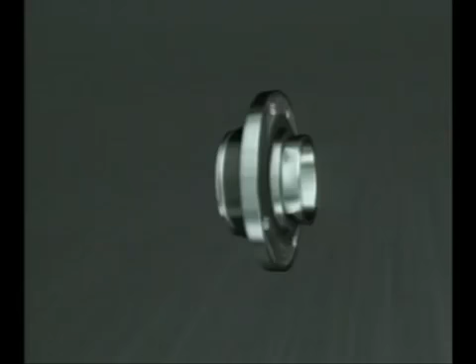Overcoming friction has challenged man ever since he invented the wheel. Friction occurs between contacting surfaces that are in relative motion. If the loads and relative movement increase sufficiently, without lubrication the surfaces will fuse together and seize up. The main purpose of lubrication is to provide a separating film to prevent this happening.

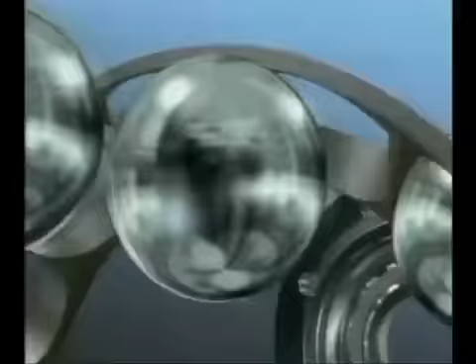For almost a century, SKF have been involved in the reduction of friction and wear by the development and manufacture of a range of rolling bearings and lubricants.

Rolling bearings can carry very heavy loads at extremely high speeds, and it's essential to have a film of lubricant between the surfaces. Mineral oil is generally used to create the very thin oil film, which is between 1/10 of a micron and up to 1 micron. Very smooth surfaces and clean conditions are required to prevent the film being penetrated and wear started.

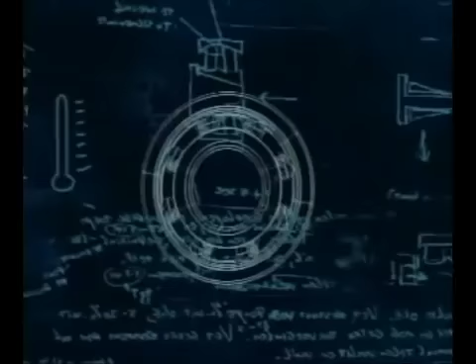To achieve an adequate oil film thickness within the bearing, a number of variables must be considered. The most important is the viscosity of the oil, which influences the film thickness. This is specified as centistoke, or millimetres square per second.

As viscosity changes with temperature, this is usually quoted at a reference temperature of 40 degrees centigrade. Viscosities used for bearing lubrication range from 2 centistoke, which is very fluid like water, up to 500 centistoke, which is comparable to syrup.

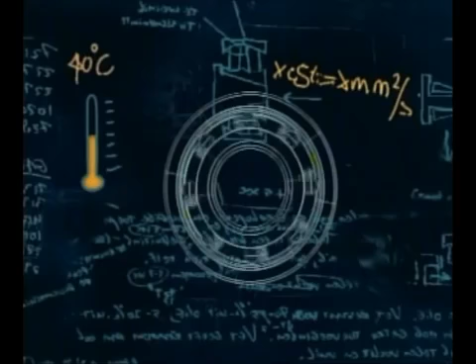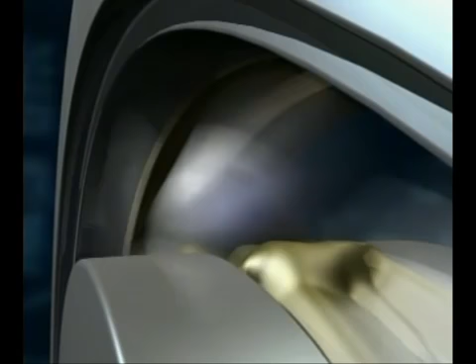The operating speed has an important effect on the lubrication film thickness. As the speed increases, a condition known as hydrodynamic lubrication develops, which significantly increases the oil film thickness. The effect is similar to aquaplaning.

At slower speeds, higher viscosity oils are required to maintain an adequate oil film. In very slow and heavily loaded applications, additives to improve lubrication are required.

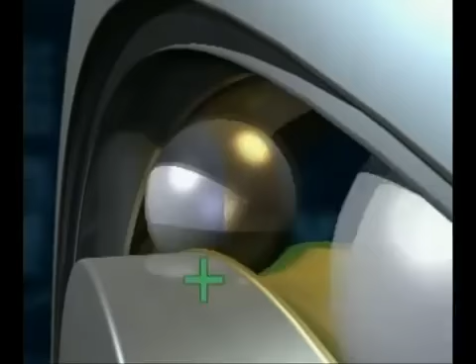Temperature within the bearing must be considered. The oil viscosity will reduce with increase in temperature, with a corresponding reduction in oil film. Oils with a high viscosity index limit the effect of temperature changes within the bearing.

The operating load has to be considered, as this has a direct effect on the contact of raceways and all rolling elements. Grease is a combination of approximately 85% mineral oil and 15% soap or thickener.

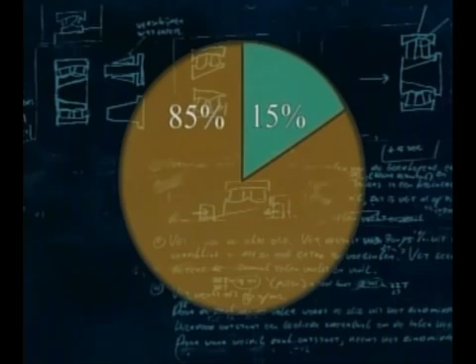The three main soaps or thickeners are lithium, a good all-round grease with a wide temperature range; calcium, which is recommended for installations exposed to water but has a 60 degrees centigrade maximum temperature; and sodium, which has good sealing properties but should not be used in wet applications.

All the soaps function in the same way. They retain the oil in a similar manner to a sponge retaining water. The oil is allowed to bleed out as the bearing requires it.

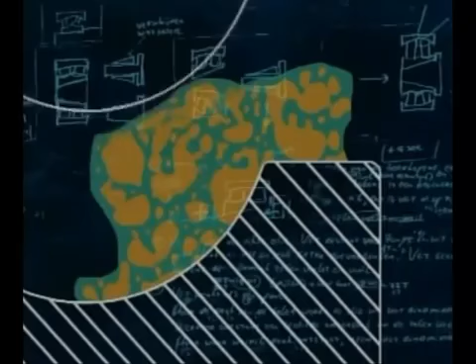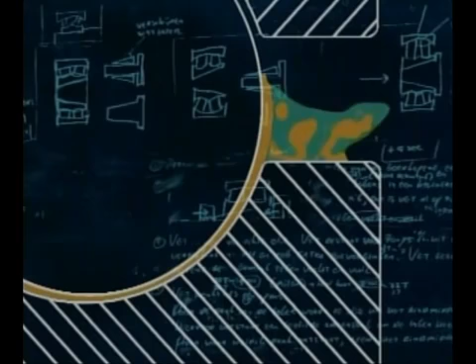Greases are measured by their stiffness or consistency. This, like the oil viscosity, can change with temperature. For bearing use, the normal range of grease consistency is between 1 and 3, with 3 being the stiffest.

Grease is by far the most popular method for bearing lubrication. It's easy to apply and retain within the bearing housing and can also function as a seal to protect the bearing. The bearing should be filled with grease and the free space in the housing up to 50%.

This is to allow room for the excess grease to be ejected from the bearing during startup. In slow speed conditions where there's no overheating, a complete fill is desirable.

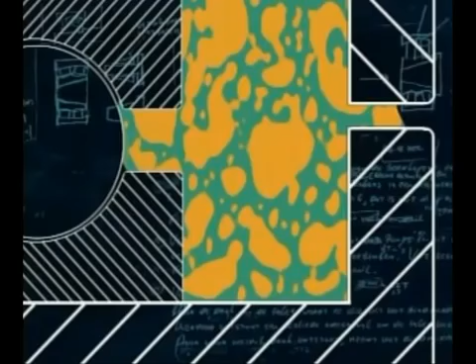Oil lubrication is a very effective way to lubricate bearings but can present difficulties with sealing. There are several methods which are used, the static oil bath being the most common. The oil level in this instance should be halfway up the lowest rolling element.

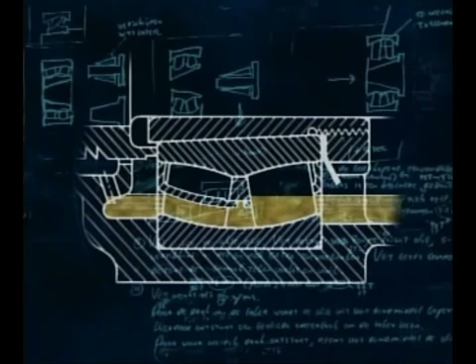In most gearbox applications, the bearings are lubricated by oil splash. On critical machinery, such as very large gearboxes or the drying sections of paper-making machines, heat and contamination can be a problem. In such applications, a recirculatory system is used.

Oil is fed by pump to the bearings, then allowed to drain back to a sump, where it can be cooled and filtered before reuse.

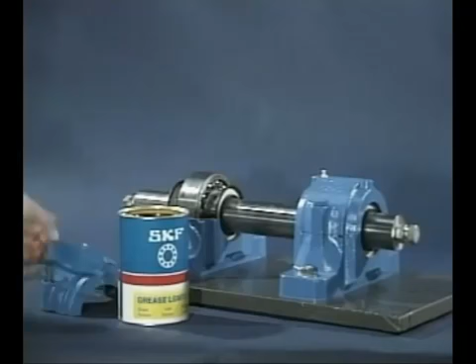With replacement bearings, it's essential to make sure that the bearing is completely full and the housing partially full of the correct grade of clean grease. Make sure the grease, like the bearing, is kept protected at all times.

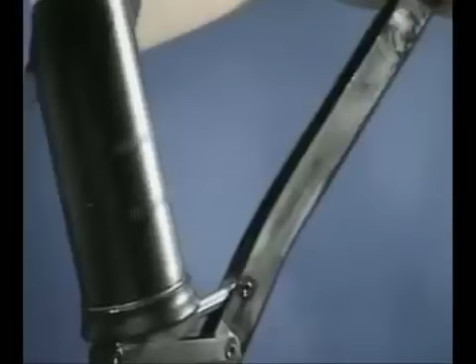In applications where the operating conditions are hot and where the environment is harsh, it may be necessary to re-grease the bearings. In these cases, provision must be made for the excess grease to escape from the housing. Regreasing should be done whilst the equipment is still rotating.

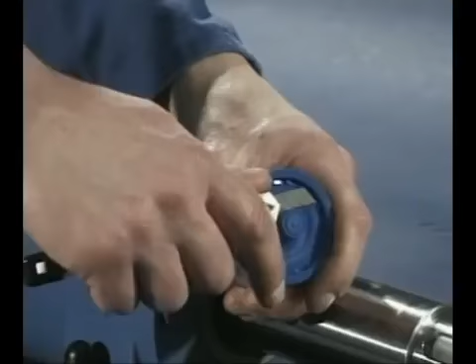In some applications, continuous lubrication is preferred. This can be achieved by a centralised system or by the use of an automatic lubricator. Ensure that the lubrication fitting is clean, that the right type of lubricant is used, and that the correct quantity of lubricant supply is set.

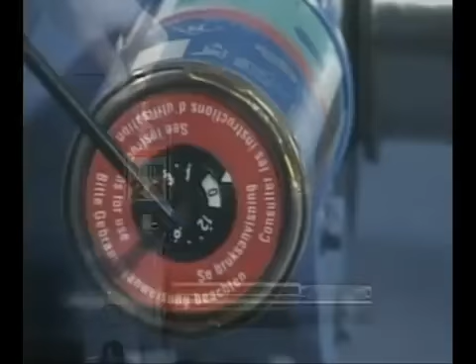Sealed and shielded bearings are greased for life and should not be interfered with.